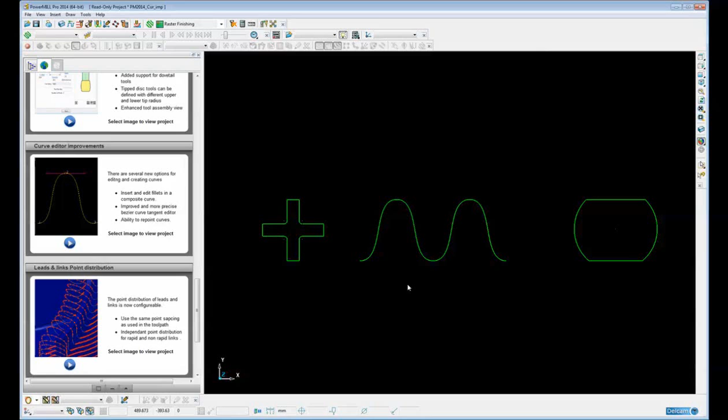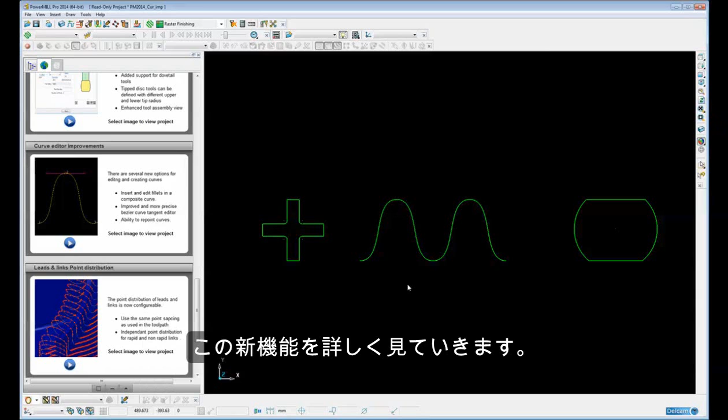There are several new options for editing and creating curves. These include the ability to quickly insert and edit multiple fillets within a composite curve containing lines and arcs, an improved and more accurate method of editing the tangency and magnitude of points within a Bezier curve, and finally the ability to repoint curves. So let's have a look at these new functions in a little bit more detail.

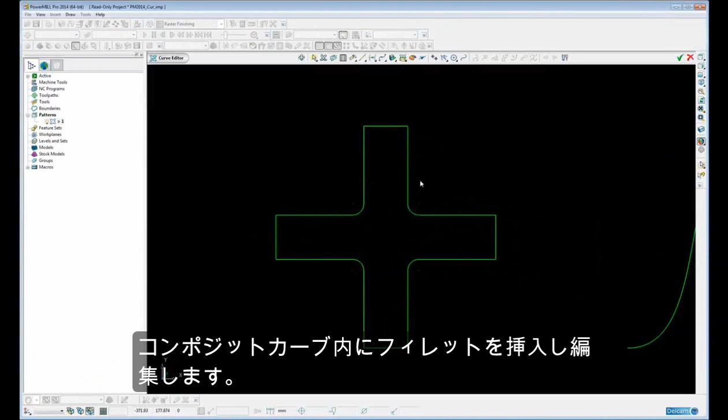So here we have on the screen a single pattern with multiple segments. So I'm going to go into the curve editor, and the first new function we're going to look at within the curve editor is the ability to insert and edit fillets within a composite curve. Now at the moment, this what appears to be a closed profile is actually made up of a series of individual lines and arcs. So before we can actually insert and edit fillets, we need to convert this into a

composite curve. So we simply select it and merge the selected segments into a single curve, and this is a single curve made up of arcs and lines. So now when we select the curve, you can see the insert and edit fillets command becomes available. If this curve contained lines, arcs and maybe Bezier spans, then this would not be editable using the insert and edit fillets command.

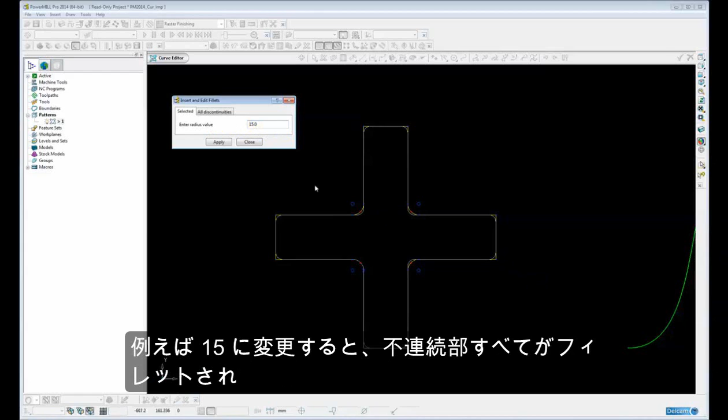But because it only contains lines and arcs, we can come into insert and edit fillets, and by default the command works on existing fillets within the profile and discontinuities. So if I change this to say 15, you will notice that all discontinuities have been filleted, plus the existing radius fillets have been modified to 15. Okay, so sharp corners and existing fillets are modified.

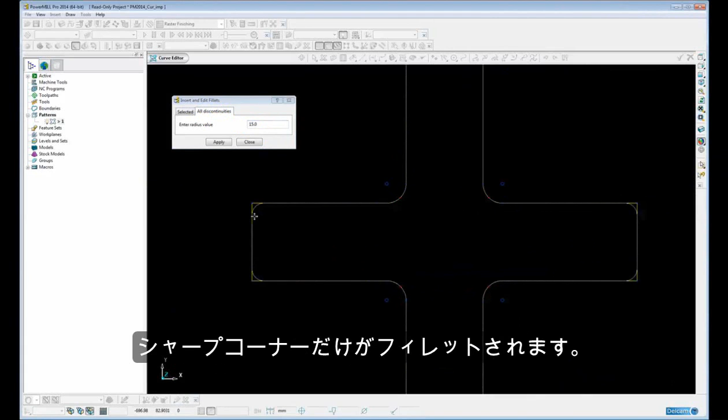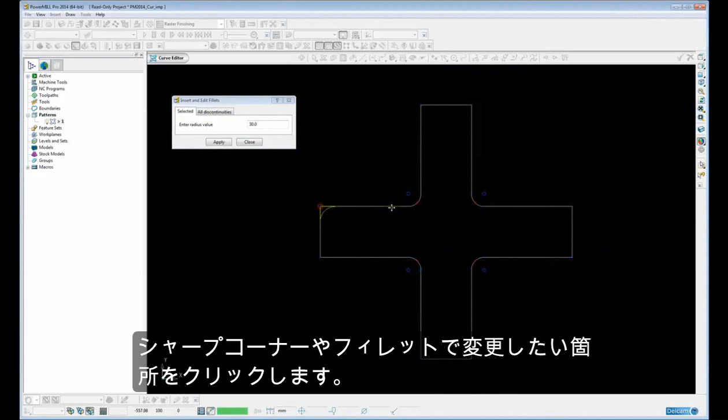If I want to keep the original radiuses within the curve, then I simply select the discontinuities option, and only the sharp corners will be filleted. Let's just change that to say 30. And finally, if I only want to choose one or two corners or one or two fillets to modify, then I simply go back to selected and just click on whichever corner I want, including sharp corners and fillets.

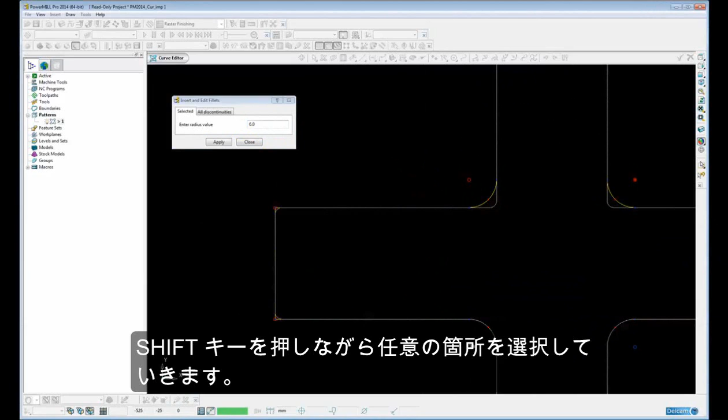Let's make that smaller so we can see it. Let's make that 6, and select this one, maybe make that 6, or that one, and I can hold down the shift key and select as many as I want, like so. Let's change that back to all discontinuities and just finish off by putting a 40mm radius, and then apply and close. Okay, so that's the first of the new functions.

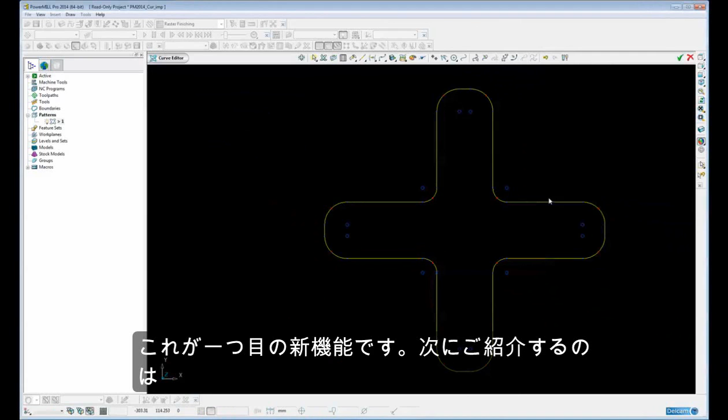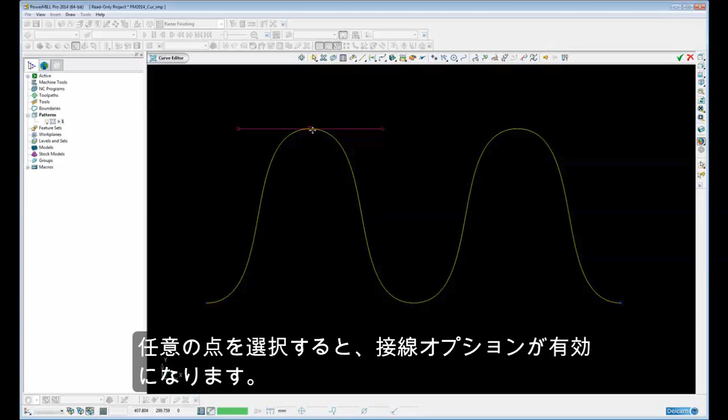The second new function within the curve editor is the improved Bezier tangent editor. So this works on the points within a Bezier curve. So if I select a point, you can see that the option becomes available, edit the tangents. In previous versions of PowerMill, we could edit the tangents by graphically dragging and dynamically moving the control points. However, this was not an accurate, precise way of editing the tangent and magnitude.

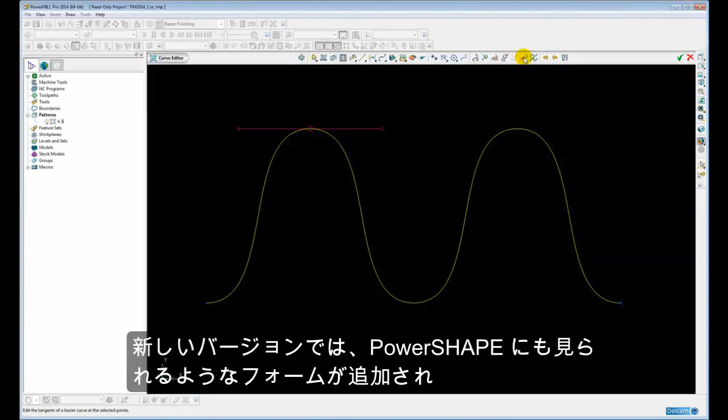So let's undo that and get back to the original shape and select the point again. Now we have a form very similar to the form that you will see in PowerShape, where we can edit the tangent before and after the point, and also the magnitude before and after the point. So for example, we can simply scale the magnitude if we wanted to, or specify a specific scale such as 2, so double the magnitude, and then we'll just set that back to 1.

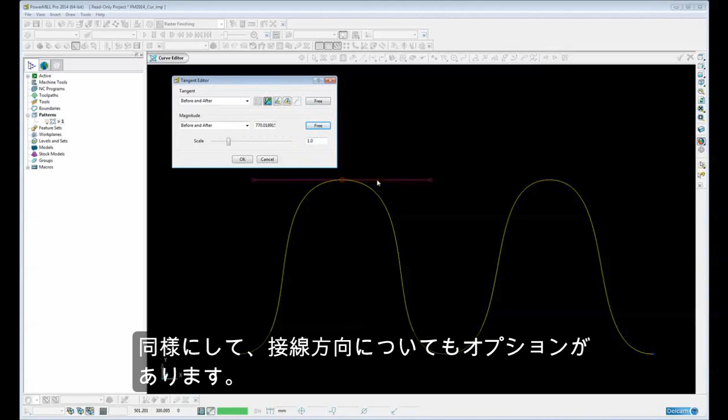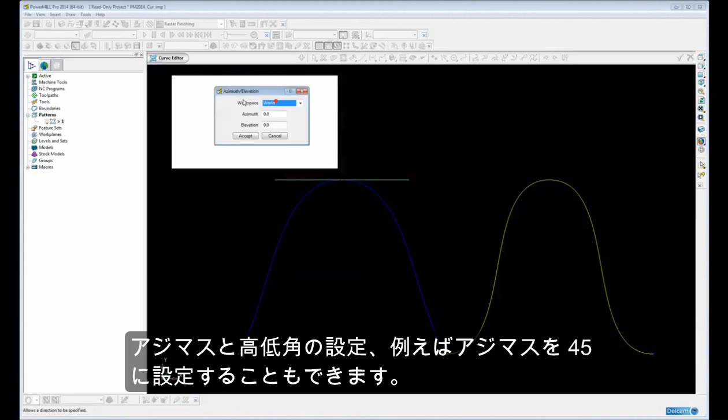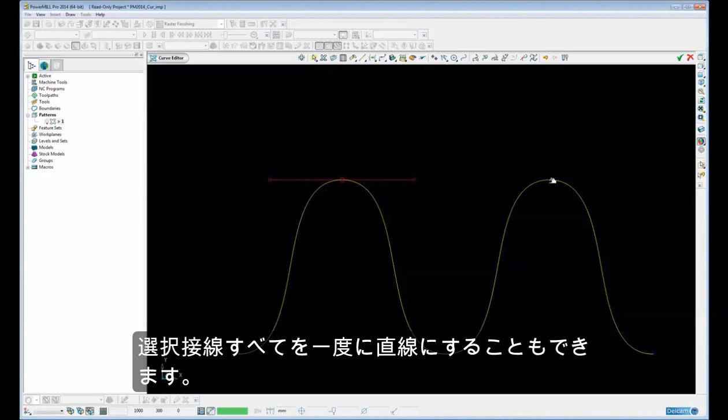Likewise with the actual tangency direction, we can use one of several options. We can straighten the tangency, for example. Let's just free that back again. Or we can specify an azimuth and elevation. Let's change the azimuth to 45 degrees. Example, let's just cancel that. Or even specify an IJK value based upon a workspace. If we want to do more than one point at the same time, we can do that by simply shift selecting multiple points, and then we can straighten all those points in one go. So that's the improved tangency editor.

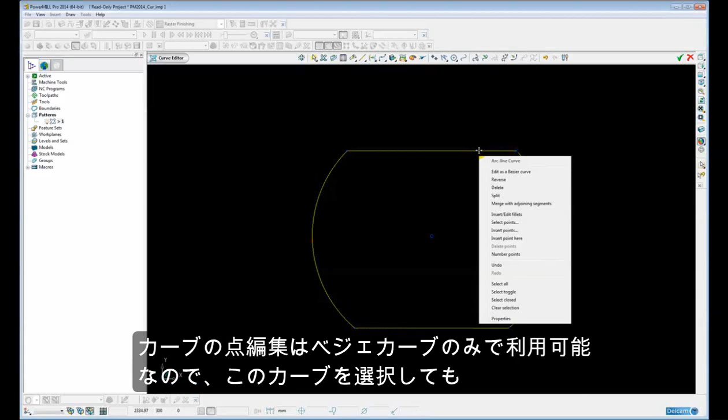The final new function within the curve editor we're going to look at is the repoint curve option. At the moment, this curve is defined as a series of lines and arcs. Now the repoint curve function only works on Bezier curves, so you can see even though I've selected the curve, the repoint curve function is greyed out. If I wanted to edit the points in this curve, I would have to convert it into a Bezier curve or edit it as a Bezier curve. There is a new option when we right click on the segment that says edit as Bezier curve. Now I have access to the repoint command.

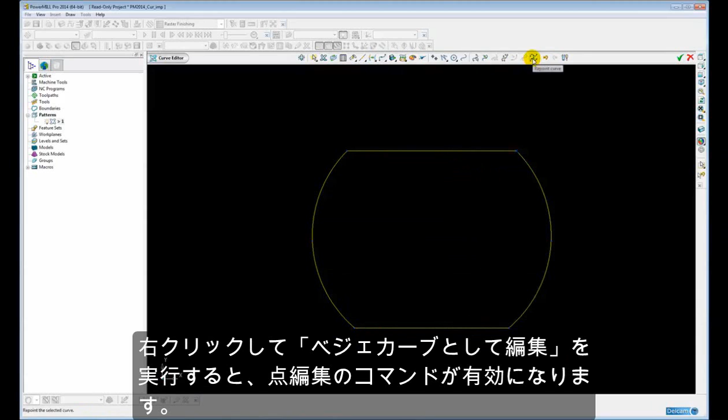So you can see the default number of points is 6, so it's actually repointed the curve to have 6 points, and because by default it doesn't maintain discontinuities, you can see the shape has changed quite dramatically. If I click on this option to select discontinuities, it will automatically find all the discontinuities and make sure those points are kept, and it will repoint in between. So obviously there's still not enough points to hold the shape, so let's increase that to say 20, and that gives me a much more accurate comparison to the original curve.

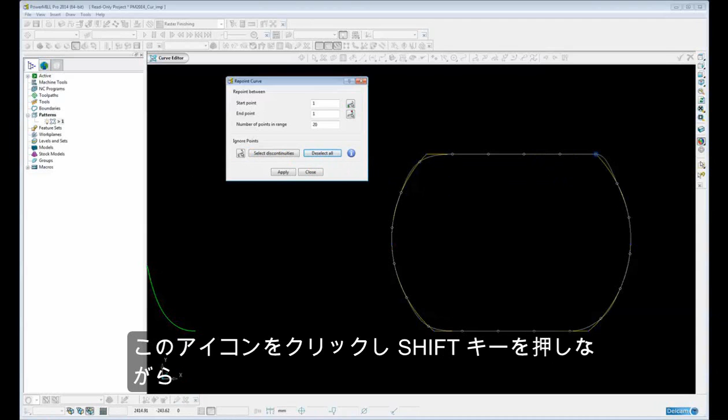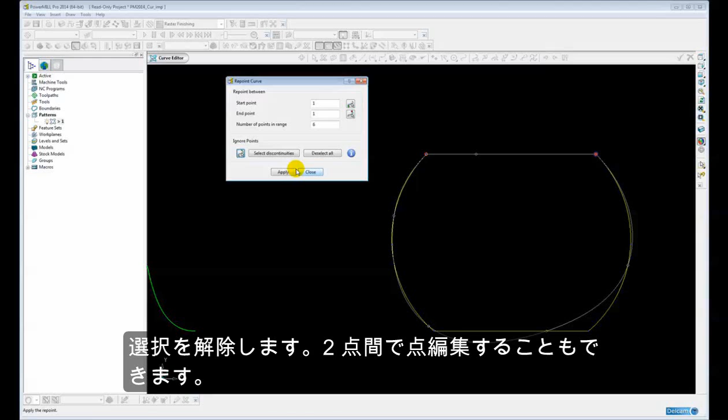If I deselect all the discontinuities again, if I wanted to, I can choose individually which discontinuities I wanted to keep simply by clicking on this icon and then holding down the shift key. I can choose maybe just those 2 points and then repoint maybe to 6 again. So you can see those 2 points have been held, and the remainder has been repointed to 6. Let's just deselect all those again.

I can also repoint in between 2 points. So for example, if I wanted to just repoint between this point at the top here and this one at the bottom, then I simply click the start point and click the end point, and then that will be repointed to 6. Let's make that 12, for example. Let's apply that and close and finish.